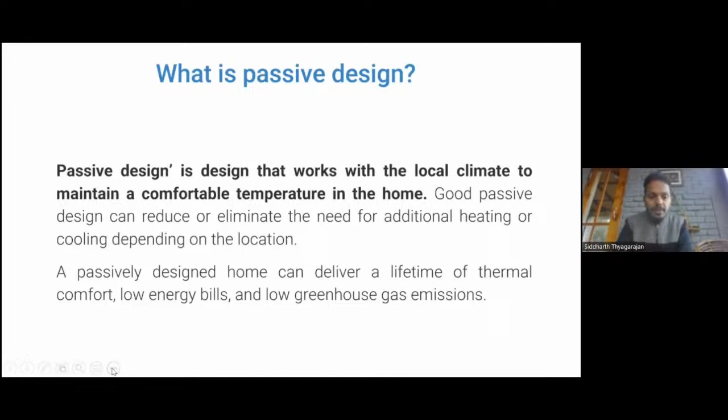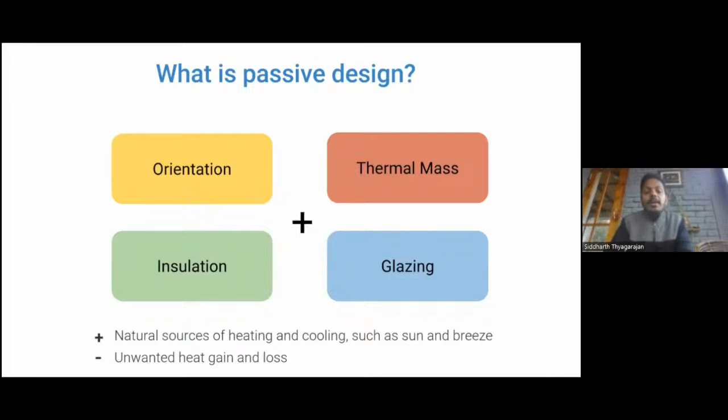Now, passive design is something that can be implemented across different parts of the world. So it's very universal in its context and its application. But let's try understanding this from the European context today. This presentation basically focuses on passive design and architecture from the Western region of Europe, specifically from the countries of the Netherlands and Belgium.

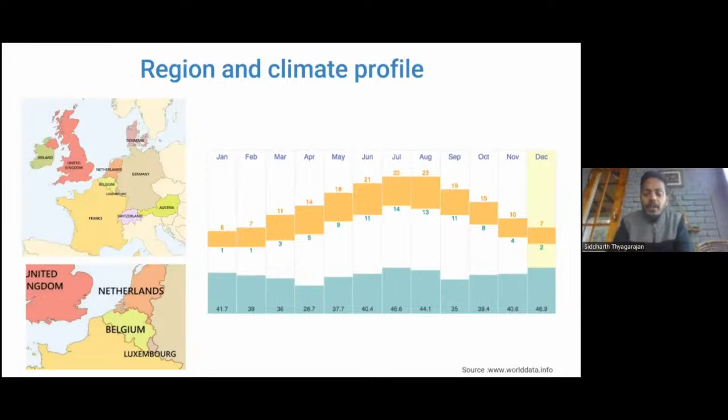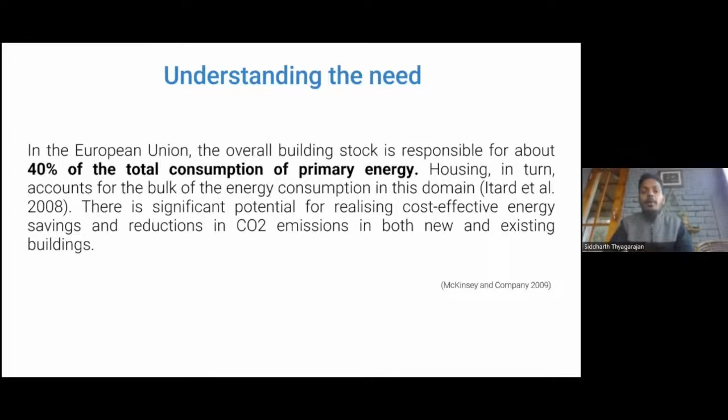Now, what is really the need for building passively within these two countries, and why is it that these two countries are really pushing for passive design within their buildings? It's been understood that 40% of the total energy that is consumed within Europe is through the building industry, and housing takes up a very large chunk of this. So, designing passively allows buildings to use less energy, which in turn also reduces the amount of carbon dioxide emissions that you release into the atmosphere.

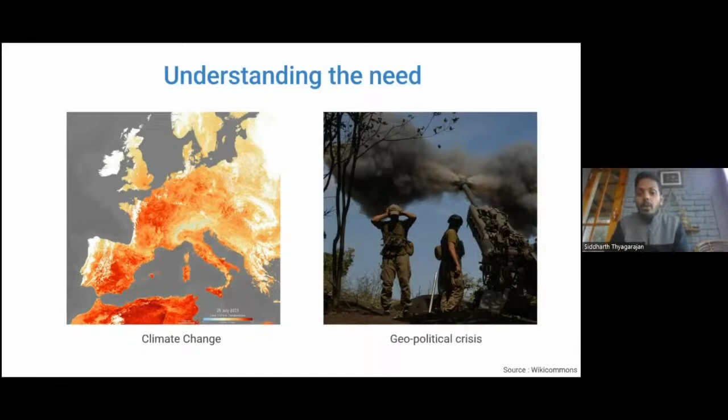Having said that, we also understand that energy is probably one of the biggest drivers for promoting passive strategies for building. But climate change has also really given the necessary push for building sustainably. And the geopolitical crisis of the Ukraine and Russia war has also put a lot of stress on energy within Europe. So, there is a greater onus on all countries to encourage building strategies which are low energy in design.

So now that we understand that there is a certain need for building passively, how is it actually being promoted within Belgium? The first thing they did was bring in more policies and bylaws. For example, Brussels, the capital of Belgium, became the first city in 2015 to make it part of its policy that all new construction in the city must be passive. They're also laying greater focus on sustainable forms of construction and refurbishment of old buildings.

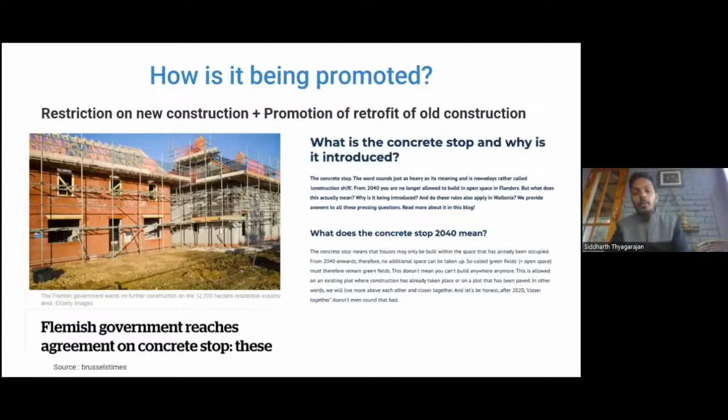Secondly, they're trying to restrict new forms of construction and urbanization, because they want to restrict the loss of ecology. Simultaneously, they are encouraging the retrofitting and refurbishment of old buildings through passive strategies, again giving that necessary push for passive forms of construction.

And finally, a lot of financial incentives: for example, 1 billion euros has been released for the renovation of existing buildings. And there are a lot of tax benefits; for example, if you choose to build sustainably, you get a 30% decrease on renovations. Similarly, you get a lot of subsidies on buying materials for building or renovating your houses sustainably.

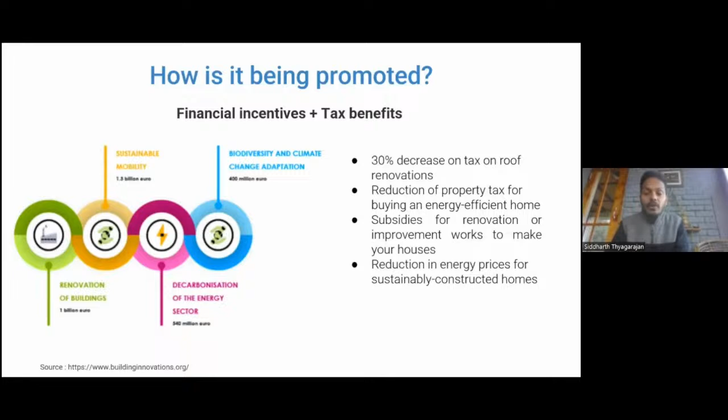So here we come to nearly zero energy buildings. While we're talking about passive buildings, what really is a nearly zero energy building? Within the context of Belgium and the Netherlands, the terms nearly zero energy building and passive building are sometimes used interchangeably. But there is a small distinction I'd like to make here. A nearly zero energy building must have a very high energy performance.

What we mean by that is that, in general, its energy consumption for its functioning should be very low. And in the way it is constructed, the energy loss, for example the loss of cooling when you're cooling the building or the loss of heating when you're heating it, should be very low. Whatever energy is used within the building is offset or covered by energy from renewable sources produced on site. I'm going to explain this in more detail in the coming slides.

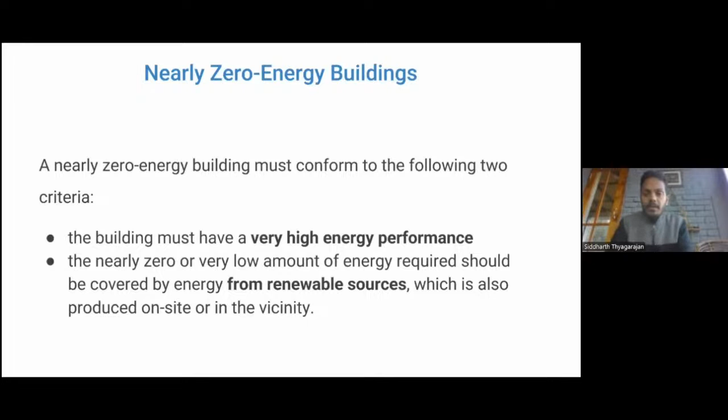As we understood in the first slide, passive design strategies are orientation, insulation, glazing, thermal mass, solar radiation, and natural ventilation. These are how you build passively. But you can combine them with active design strategies, which are mechanisms or engineering you bring into your building to make it more sustainable, such as a mechanical ventilation system, an electrical or lighting system, or a chiller or boiler system.

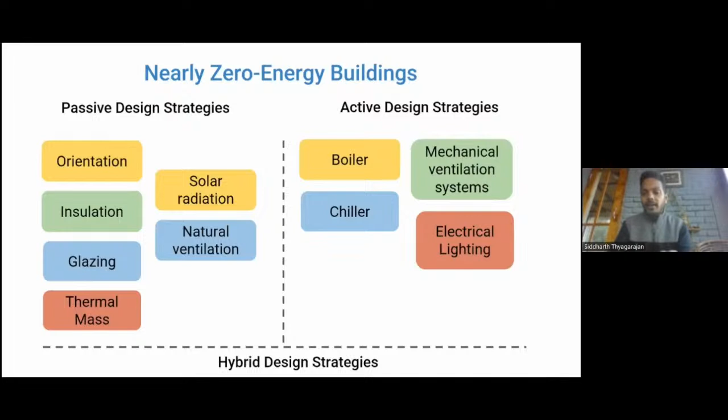When you combine passive design strategies and active design strategies, you get hybrid design strategies, which make a nearly zero energy building. So a nearly zero energy building is ultimately a combination of passive and active design strategies, which can be understood through this graphic.

What we see here is that this particular building has been built passively, with insulation and the kind of glazing used, but simultaneously they've installed solar panels, capitalized on geothermal heat, and the idea of having wind power or fuel cells within your own building to offset that extra energy is what brings you to a nearly zero energy building.

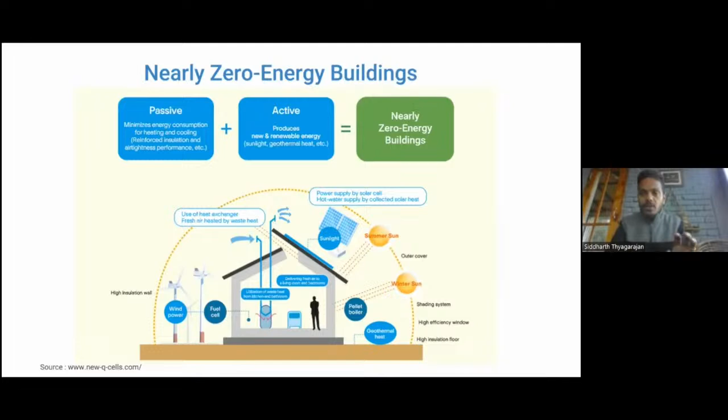So while we understand nearly zero energy buildings, I would like to bring our focus to the passive component of that, which is passive building principles. If we look at Europe, what are the five principles one needs to understand to be able to call a building passive? The first principle is having an adequate ventilation strategy.

Because while we want our building to respond to the local climate, the building also has its own microclimate. For example, when it is cold outside, you typically want your building to be heated. But to ensure your building also has good living conditions, it is important to have a good, adequate ventilation strategy, which also helps recover heat.

The second principle to take into consideration is that your construction needs to be absolutely airtight. For example, if you're cooling or heating your building, we need to make sure there are minimal losses through any gaps or leaks, preventing any form of energy loss. The next thing is no thermal bridging.

So what exactly is a thermal bridge? A thermal bridge is usually created when, for example, you have two different materials on your facade which kind of come together. So, for example, if you are building a wall and your wall is made of brick while your window is made of glass, these two materials basically, when they come together, have different degrees of conducting heat, and because of which there can be loss in energy. So we have to make sure that we can counter this by working on the thermal bridge.

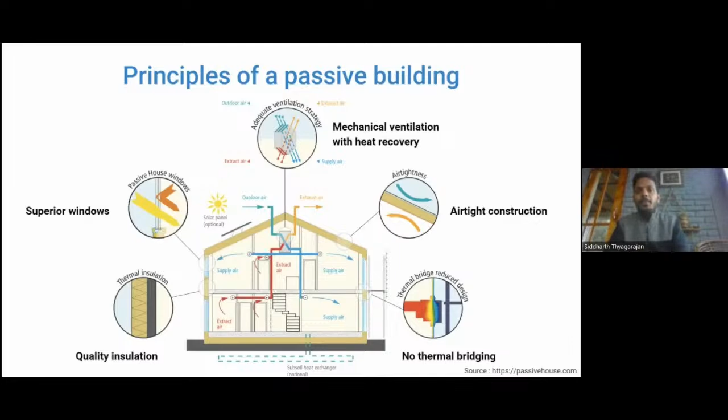And the fifth important principle that one needs to look at is quality insulation. So insulation is a very important component to prevent any form of heat loss or heat gain as well during summers within a building. So now we'll start looking at each of these principles of passive building in a little more detail. But before we get on to that, it would be interesting to understand how energy loss in a building even occurs, and why it is that we are particularly focusing on these five components, which we say are the five principles of passive design.

So if you look at this particular diagram, if I were to heat or cool a particular building, then 30% of the energy loss is from the roof. So, for example, if the roof was not insulated, or if there were some air leaks or air cavities on your roof, that means 30% of your energy is actually lost. Similarly, 20% of your energy loss is through ventilation, 15% through your windows, 20% through your walls, and 5% through your thermal bridges, indicating that integrating passive design strategies into your building to prevent energy losses is extremely critical.

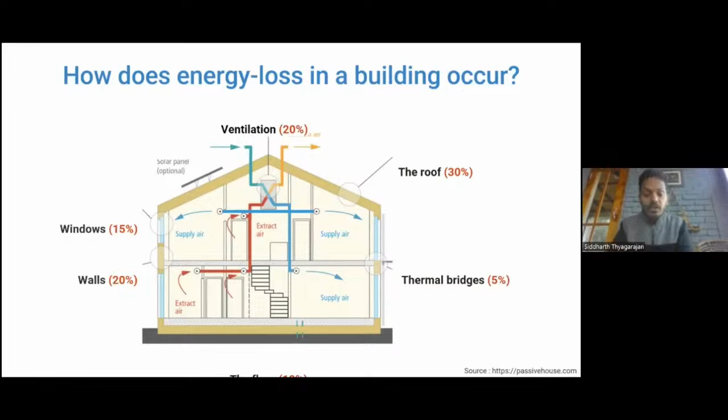So we begin with the first principle, which is mechanical ventilation with heat recovery. So what I'm going to be taking you through is how these passive design principles are actually implemented, or how they're translated in the Belgian context. So one such strategy for ventilation is that they use heat pumps. So typically in our countries, where, for example, we use air conditioning, or in the winters we use electric heaters to heat our buildings, they're very highly energy consumptive.

But one thing that has been mandated and is becoming extremely popular in Belgium is using heat pumps for cooling and heating buildings. And how they typically work is that they rely very little on external electrical energy, but they take heat from the air, or they take heat from your groundwater, from your ground systems, or they take heat from a surrounding, or chilling from a surrounding water body. And using the principles of compression and evaporation, they're able to heat or cool your homes and simultaneously ventilate them.

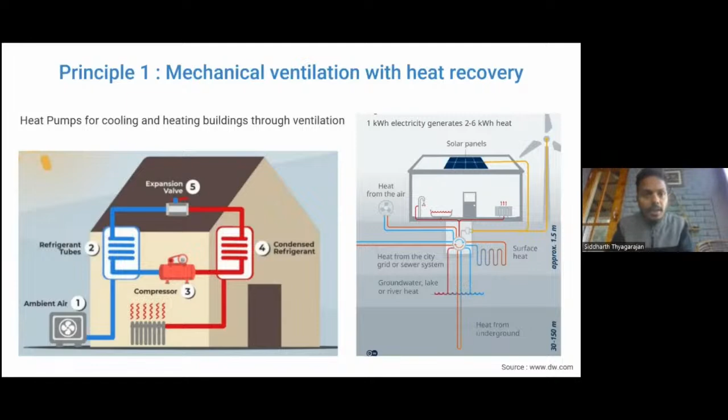The second principle is insulated glazing. So, how does insulated glazing perform? So insulated glazing is where you have typically two or three layers of glass within a single panel. So you basically create a sandwiched panel with an inert gas between each panel, such as argon or krypton. And this inert gas basically acts as your insulating material. So apart from insulating against the external temperature, these windows are also very good for acoustic insulation.

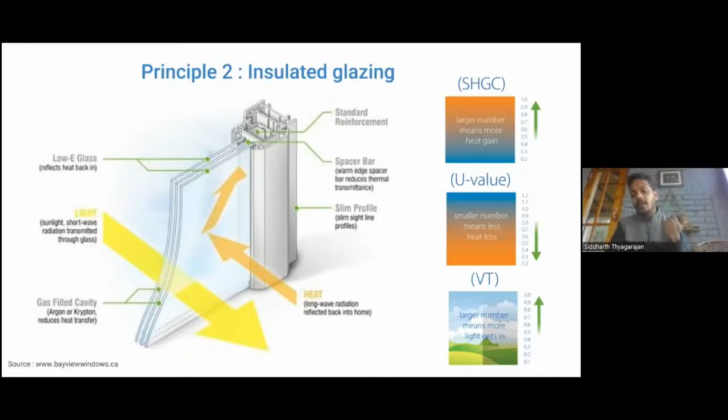Three components of insulated glazing which are interesting and probably one should know about: SHGC indicates the solar heat gain coefficient, which indicates the amount of heat that is actually brought in through the window. And in a colder climate, the higher it is, the better it is. The U value is the amount of heat which is lost by the entire window section. And the lower your U value, the better. And VT talks about the visible transmittance, which means that the higher this number, the more visible light you get in. And similarly, the higher the number, the better it is.

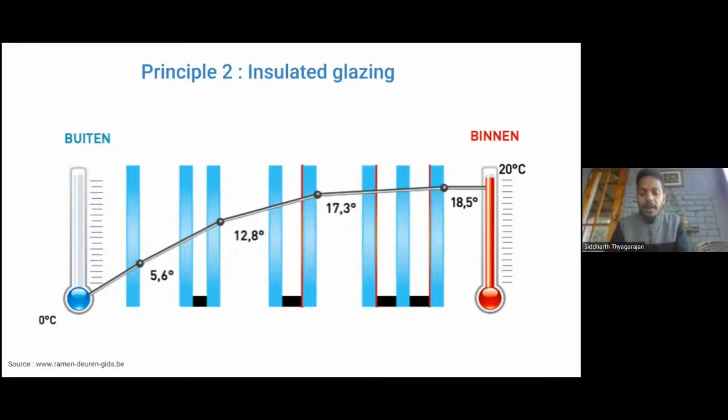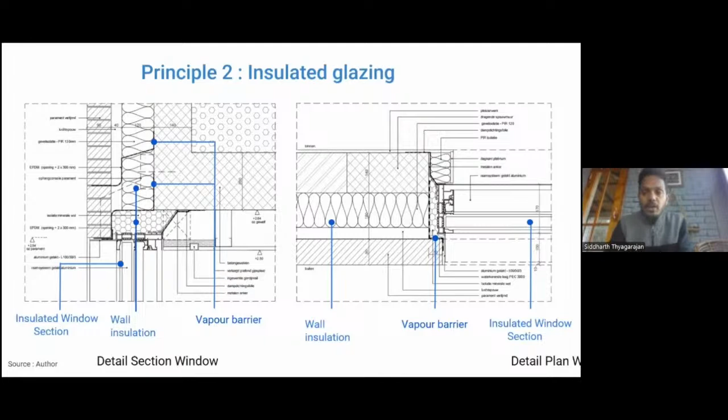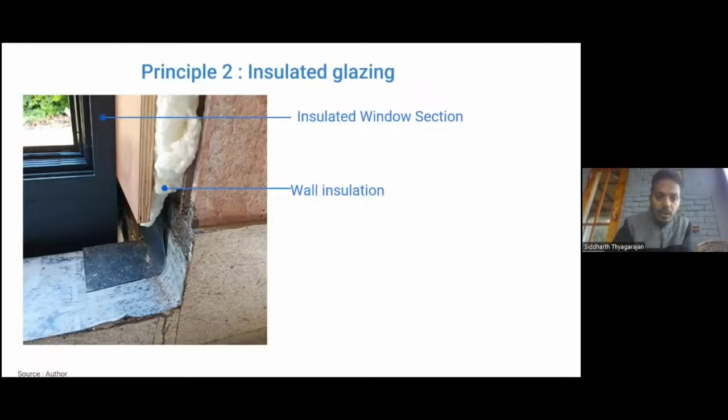And it is a mandate that all new buildings use a minimum of a double glazed section for minimizing energy losses. This we can also see in a photo taken from a site over there. So you have your triple glazed window section over here, and you have your wall over here. Between the both, you have insulation, and what you have here is a bit of a vapor barrier.

Now we come to our third principle, which is quality insulation. So insulation is a very, very important component of all your buildings, and insulation doesn't just perform for buildings where you want to retain the heat, but it also works very well for hot temperatures as well. For example, if you're cooling your building and you don't want the losses of cooling, insulation works well in that way as well. Typically, insulation is done in every external surface of your building. So you would insulate your roofs, you would insulate your walls, you would also insulate your ground.

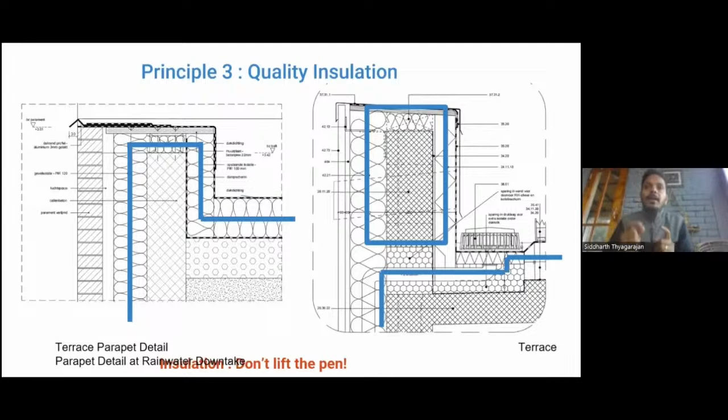And what I have indicated here is, for example, a typical terrace parapet detail where this wavy line that you see is basically your insulation, which has been indicated also by the blue line. Similarly, the idea is that you always have a continuous line of insulation. So, for example, if you were to design insulation for your building, how they would typically say is that you take a pen and you draw a line all around your building, and that's how the insulation needs to follow. Any break or any discontinuity in your insulation means that that is a point through which energy losses can take place.

Some site images to show you what insulation looks like. So what you see here through the brick is the external facade, and these silver panels over here are your insulation panels, and then what you see on the inside is your internal wall. Similarly, the wall, like I said, is not just insulated from the front, but you also typically would insulate your wall from the bottom, so that there are minimal energy losses when the wall actually meets the slab below.

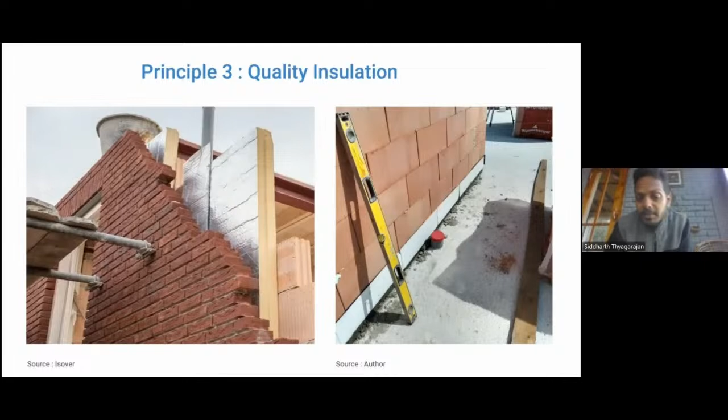So the fourth principle is airtight construction. Now, why is airtight construction important? So what typically happens is when, for example, we install a window at a wall, there are some small gaps or leaks which might come in because of an uneven surface, or some mismatches in your construction, and these little points become possible areas where you can have a lot of energy loss. So airtight construction becomes an extremely important component of designing your buildings as well.

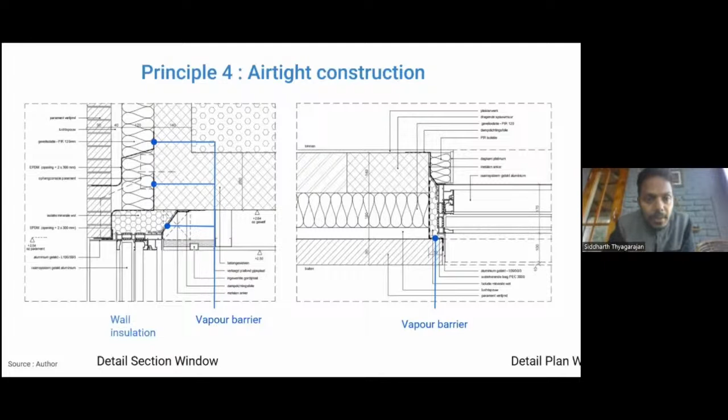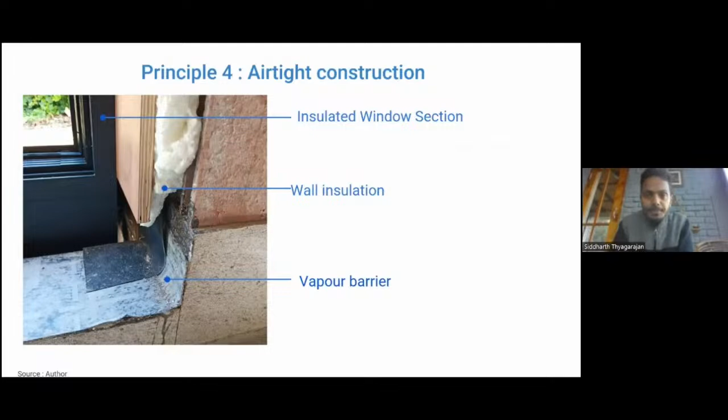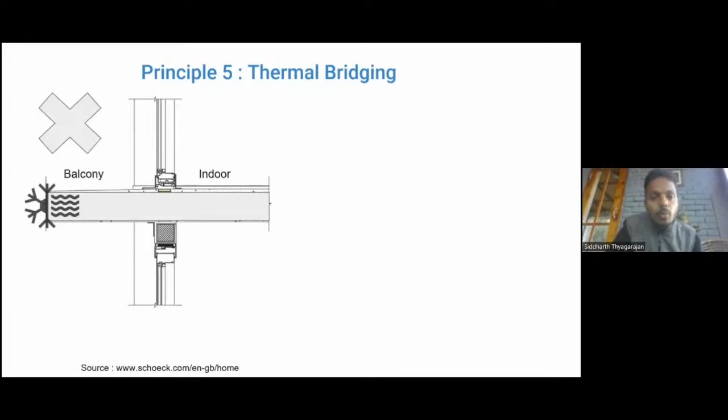So the way we typically construct to prevent this from happening is that we design the balcony as a separate unit. We design the indoor unit as a separate unit, like what you see over here. And in the middle we give an insulation to give a thermal break.

So if this space was heated and this space was cold, if the cold air cools up this particular slab, it would not be able to pass through this insulation, and then this space continues to remain warm. So that is how a thermal bridge typically works.

So these are five basic principles which one would typically follow to design passively. Of course, looking at the kind of technologies and developments, the market, or the entire concept of sustainable construction is far more evolved than what I have actually showed you today. But the idea is just to introduce you to how different countries approach the entire idea of energy efficient construction.

And it is also important to understand that no one principle works in isolation. In each detail or each component, you see that all these elements come together. So for example, even in a typical building, you would have your energy, your double glazed windows, your thermal bridge working with that. Similarly, you would have your insulation coming in the right places. So all of them working together can help you design what we would call a passively designed building.